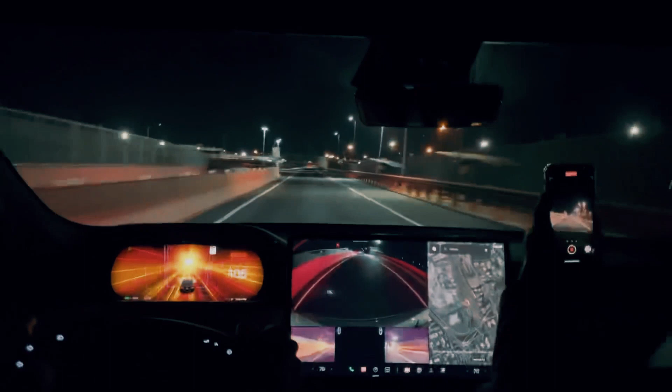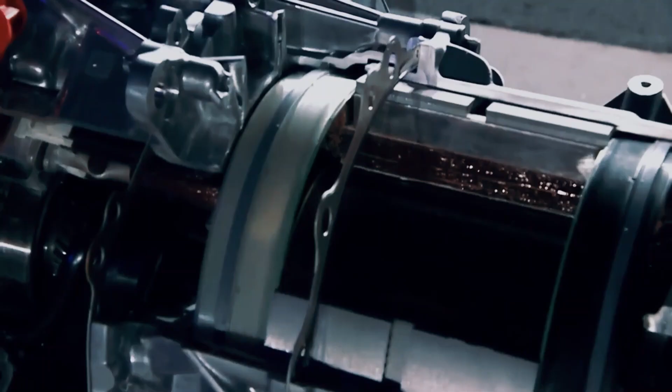In order to do a carbon overwrapped rotor, you've got to wind it at extremely high tension. I mean, this is really an amazing work of engineering. The real reason Tesla developed the Plaid motor.

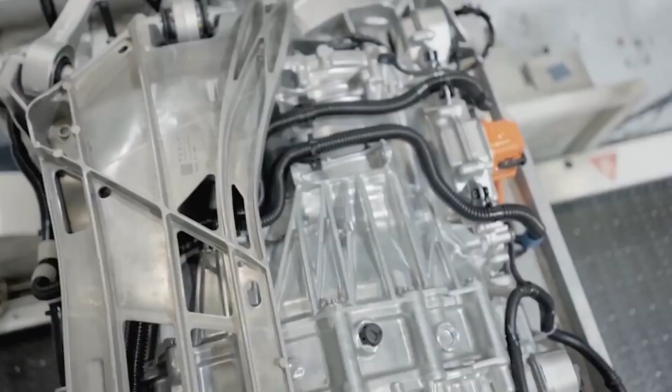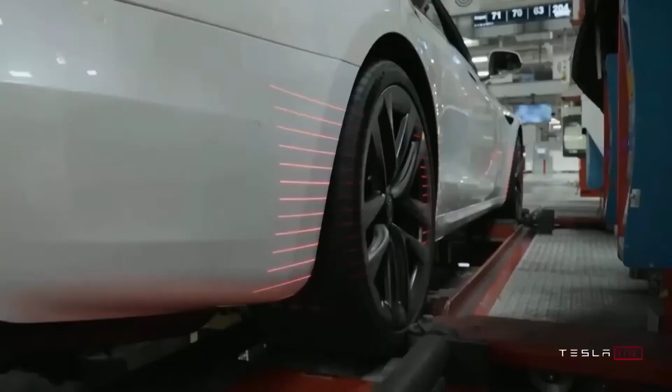What makes the Tesla Model S Plaid the most powerful production vehicle ever on the road in terms of acceleration? There are a lot of various components working together, but the Plaid's 3 extremely unique electric motors and battery pack are at its core. Even with a sophisticated design like the Plaid, learning the fundamentals of what happens inside a Tesla motor is actually not that tough. So let's begin.

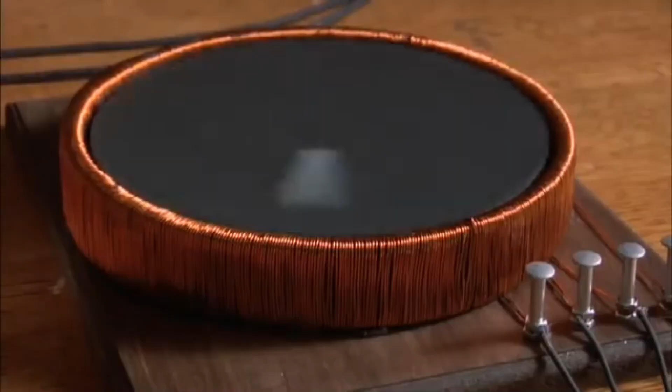Nikola Tesla was an engineer and inventor who worked with electricity and magnetism in the late 1800s and early 1900s. Nikola's invention of the induction motor, an alternating current motor powered by electromagnetic induction, is the real reason that Tesla, the automobile manufacturer, adopted his name.

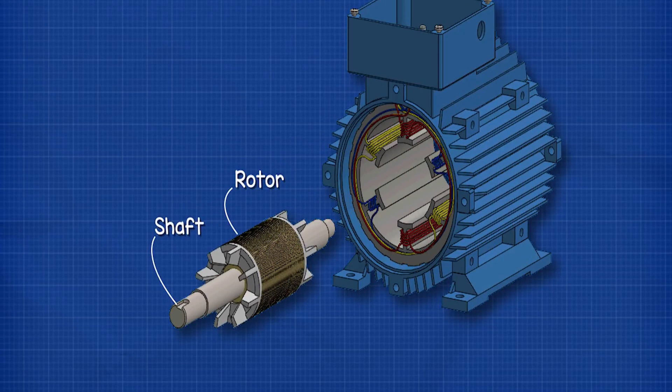The stator and rotor, 2 essential parts of the induction motor, are located inside. The motor's inner center, the rotor, spins while the stator, which is still, is the outside ring. A rotor in this application is the iron core surrounded by rows of permanent magnets that run lengthwise. For simplicity, let's say there are 4 rows and these magnets are evenly spaced around the ring: top, bottom, left, and right. Each quarter of the ring has an alternating pole, so they go north and south as you go around.

Each coil of copper wire in the stator's tube of electromagnets, which surrounds the entire ring and runs lengthwise, functions as a separate electromagnet that can be turned on and off and have its polarity reversed by simply adjusting the power fed into each coil.

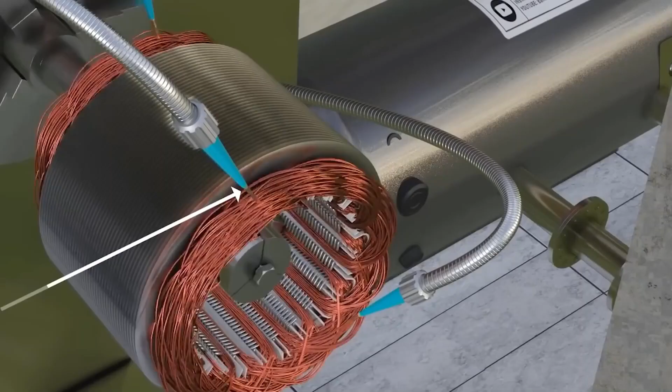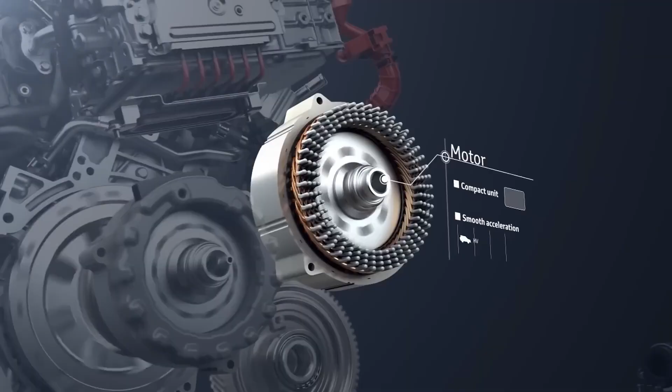By enclosing the rotor inside the stator, we have a permanent magnet inside of an electromagnet, creating a magnet within a magnet. Whenever you place 2 magnets close to one another, a natural push and pull will occur, with the opposite poles pulling toward one another and the like poles pushing apart. The rotation will, however, come to a stop once the first alignment is finished.

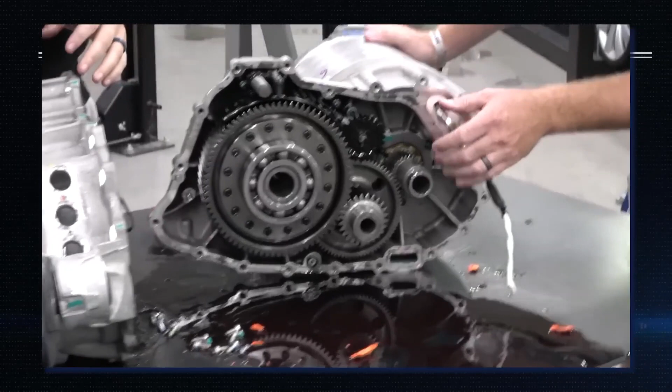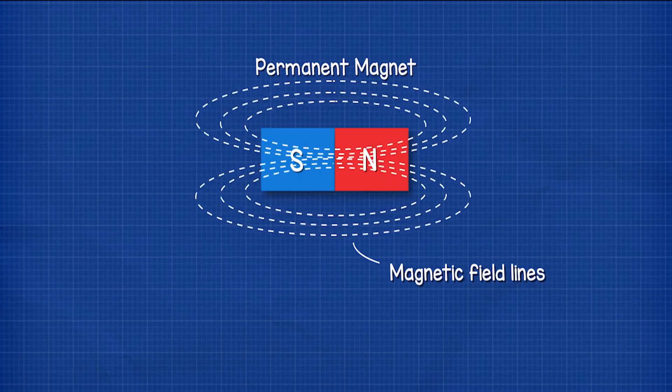To keep the stator magnets' north and south poles rotating around the outer ring, all we need to do is move them back and forth continuously. We accomplish this by regulating the flow of electrons through the wire coil. As a result, when the south pole of the stator rotates in a circle, it pulls the north pole of the rotor along with it. Conversely, when the south pole of the stator rotates to the opposite position, it pushes the south pole of the rotor. The rotor will spin due to this constant push-pull action, and the faster the magnetic field is moved around the stator, the faster the rotor will spin.

This is what the Tesla T logo represents. It is a cross-section of an electric motor, with the sharp T shape representing a slice of the rotor and the top curving line representing the stator ring.

If it were that simple, everyone would do it, which would also mean that the Rivian R1 with 4 motors would be the fastest car in the world, but it isn't. There are other factors at play in making this car so fast.

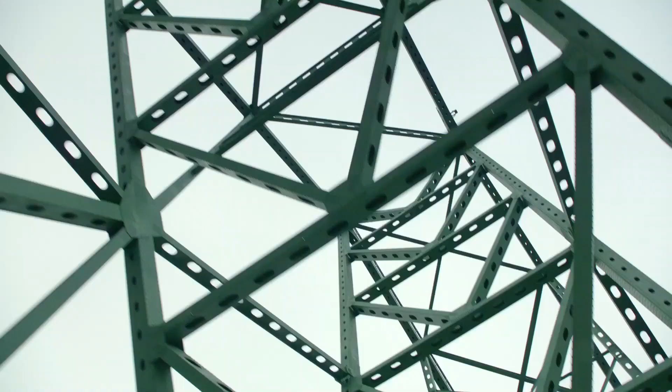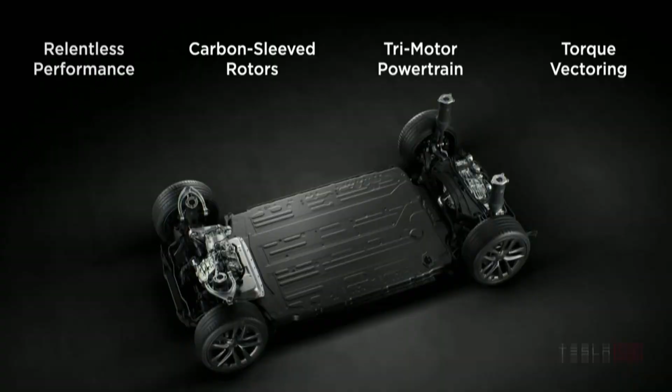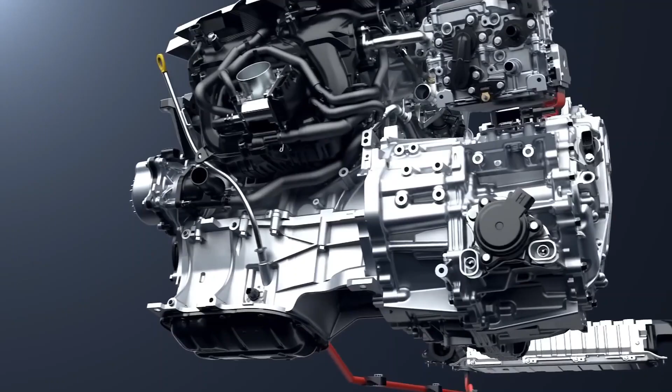Since Tesla specifies the Plaid design as having a carbon rotor sleeve on the product page, we know this is a distinguishing feature, and Elon made a lot of mention of this carbon sleeve technology at the Plaid launch ceremony held at Tesla HQ in 2021. This is the first rotor that Elon is aware of that uses carbon composite instead of the typical steel sleeve around the outside. The rotor is actually wrapped in a very tight layer of carbon fiber threads.

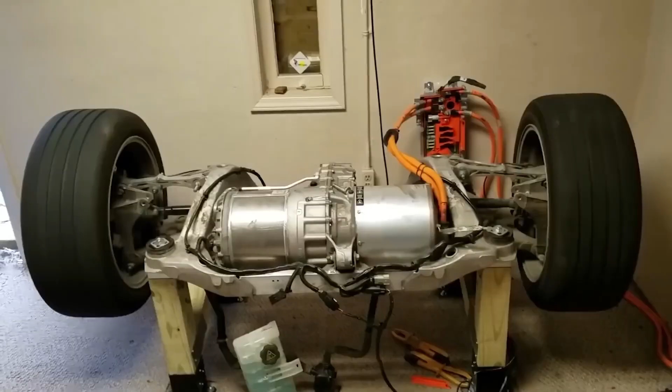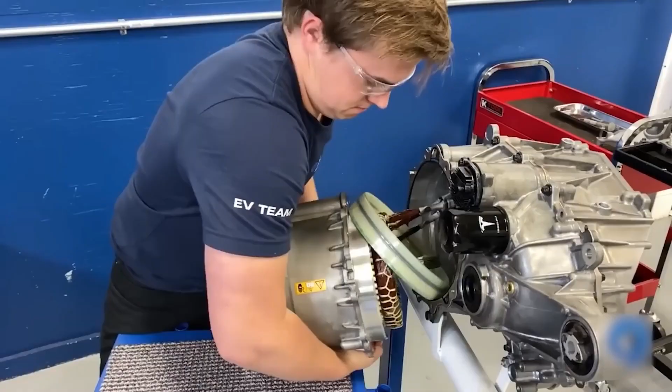If you're more familiar with a fishing reel or a bobbin being filled with thread, that would be a good analogy for the rotor. Additionally, epoxy is soaked into the carbon fiber thread to cause it to form a solid mass. Elon claims that Tesla performs this wrapping process under extreme tension. They actually had to build a new machine that could wrap the threads tightly enough.

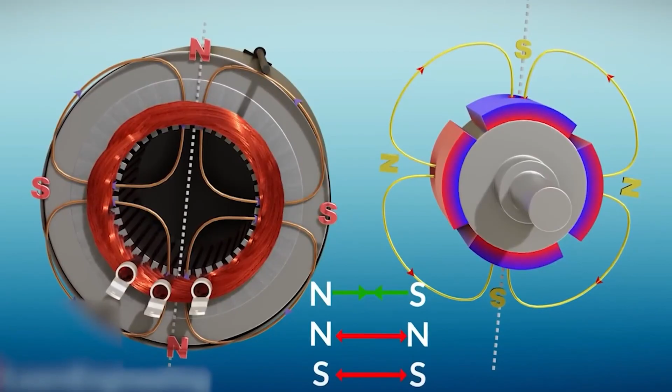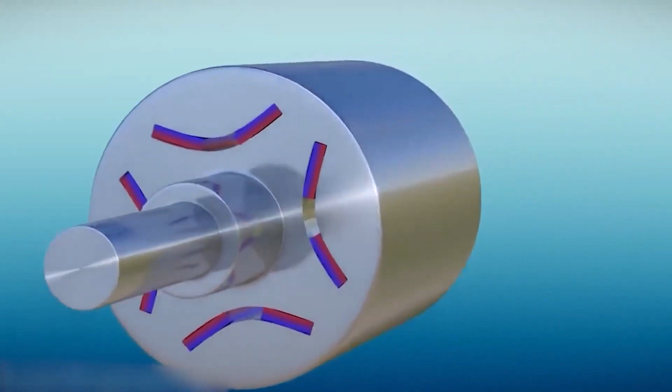The reason for this is because the carbon fiber actually has to be compressing the rotor to prevent a separation from ever occurring when the rotor contracts. This is because the rotor material will shrink at low temperatures, but the carbon fiber will not. So just as the rotor can contract, it can also expand, and not just at high temperatures but also under extreme pressure, like when it's rotating at 20,000 RPM. Elon hinted that if the wrap wasn't holding the rotor together, the centrifugal force would actually lead it to extend outwards and would potentially fly apart.

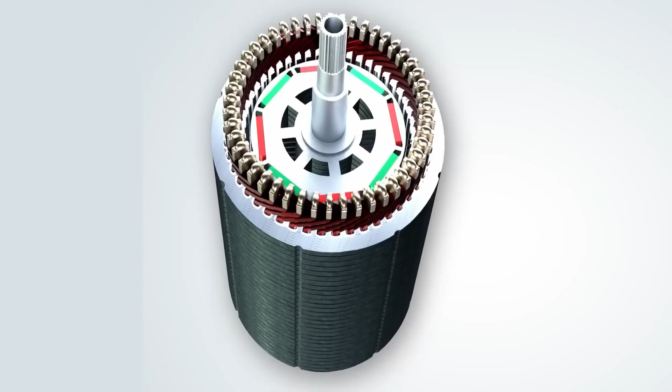But because we want to keep the gap between the rotor and the stator as narrow as technically possible, we don't want the rotor to expand. We know that the force of attraction and repulsion between 2 magnets increases with their proximity. The rotor is spun by that force, which is at its greatest when the rotor is as close to the stator as it can be.

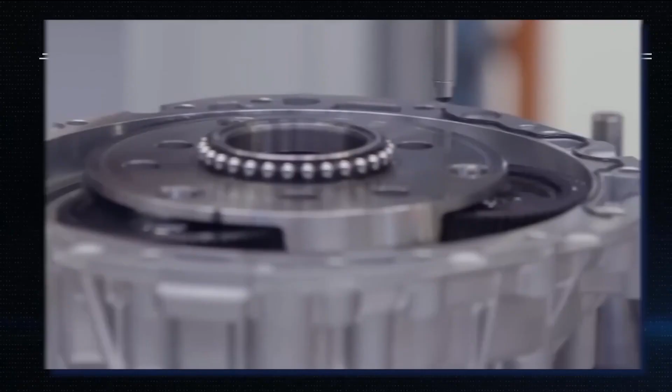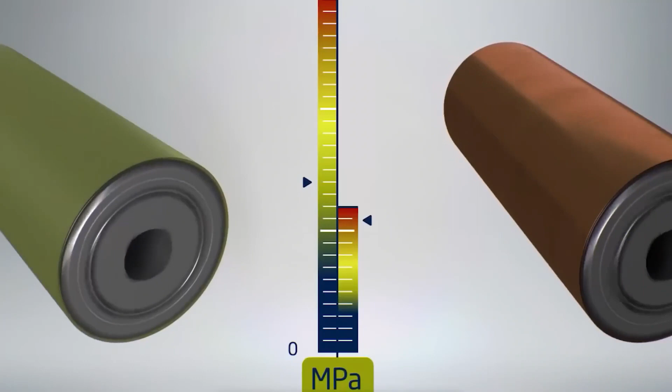But if we know that the rotor would enlarge at maximum power, we'll need to widen the space between the two to account for that growth. We can keep that gap much smaller if the carbon fiber wrap is keeping the rotor from growing. We're talking about microns here. Although this is a minuscule measurement, it is important for maximizing the performance of your motor. This enables the Plaid to maintain maximum power over its range.

All prior Model S motors have a power curve that shows that while they start quite powerful, they actually lose power as the vehicle's speed rises. This is not what the Plaid does.

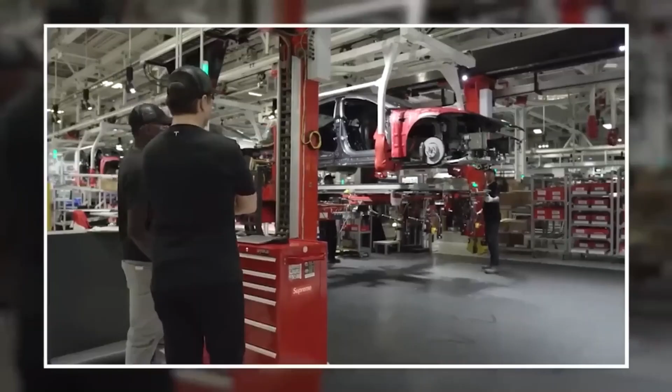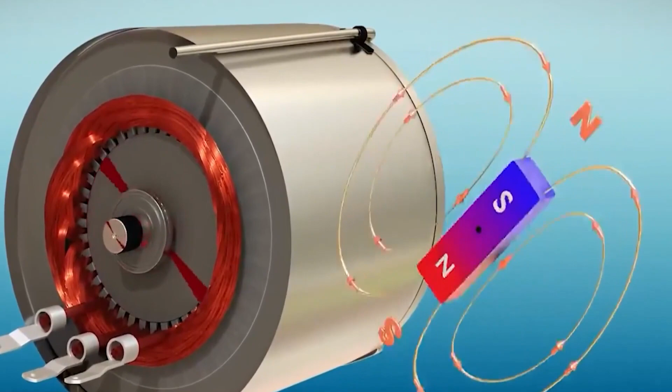The Plaid's rotor permanent magnets are substantially more potent than the typical electric car motor, and even outperform Tesla's regular motor in terms of strength. The magnets within the Plaid rotor are more than a third more powerful than the rear motor of a dual-motor Model Y or Model 3, and are almost twice as strong as the magnets inside the rotor of a Mustang Mach-E.